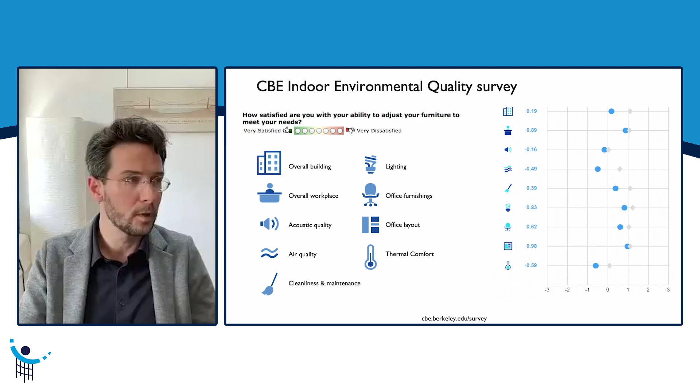And by looking at the data, we found that overall, roughly two-thirds of the occupants are satisfied with their space. Here the results are mainly about office environments, but we also have data for other types of environments, like for example schools or residential buildings.

And when we look at the things that are not going well, we notice that there is a high level of dissatisfaction with acoustics, in particular acoustical privacy - the ability of other people to hear what you are saying, or you being bothered by what other people are saying - and thermal environment.

If I go a little bit more in detail, in this slide you see the satisfaction level. These are data from roughly 900 buildings, almost 90,000 answers. This is by far the largest database available in the world about this topic. Usually the other databases have a subset of, let's say, 50, maybe up to 100 buildings. We collected this dataset over more than 20 years of research.

So we can see that overall, people are quite satisfied with the ability that they have to interact in the building. They are also quite satisfied with the amount of light. But even in this category, which has the highest rating, we still see only a satisfaction level of something around 70 to 80%. We are not able to achieve a higher level of satisfaction.

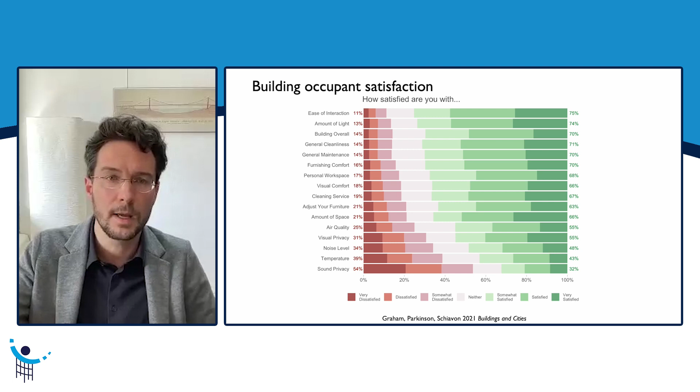Another way to look at this is through certification programs. Buildings can get certification for how sustainable they are or how much they promote well-being. One of these is the WELL certification in the United States, a performance-based system for measuring, certifying, and monitoring features of the building environment and how they impact health and well-being. They look at aspects like air quality, water, food, lighting, physical activity, thermal comfort, and mental health.

Here is an example of a sub-point related to the thermal environment. In this type of certification, the more points you get, the better. You get 2 points if at least 80% of people are satisfied, and 3 points if at least 90% are satisfied. Based on the data I showed earlier, we are very far from achieving this goal—typically only about 5% of buildings are able to achieve at least an 80% satisfaction rate.

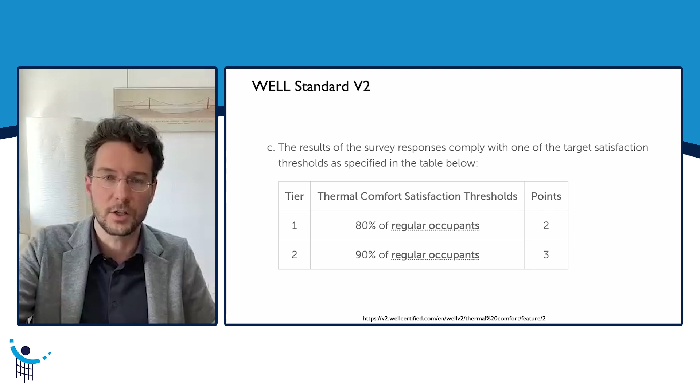When we look at why we're achieving such a low satisfaction rate, we notice an interesting trend. These results are for any type of building, but here I'm focusing only on temperature. The reason we see such a high level of dissatisfaction is that people do not have enough control over their environment.

Another interesting point is that people tend to be happier when they are close to a window, particularly if that window can be opened, giving them control. Moreover, they tend to be happier in a private office, probably because they can adapt their environment to their specific needs.

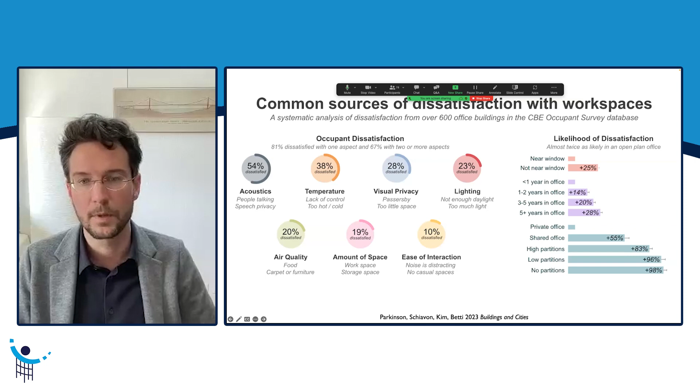Another interesting result is when we compare satisfaction levels for male versus female. We've done this analysis in two ways: one by looking at tweets people make related to their built environment, and the other from our own survey. What we notice is a higher level of dissatisfaction among females.

In a very bothering way, we found the problem is strongest in summer for people feeling too cold. In a building, we would like to see that if someone is uncomfortable in winter, it's because it's too cold, not too hot—because that means we are using energy cleverly and not wasting it to make people uncomfortable. Similarly, in summer, we would like people to feel too warm rather than too cold, but we found that 20% of occupants are unhappy in summer because it's too cold inside the office.

When we look at who is feeling too cold, 76% are female, meaning that at the same time we are wasting energy, we are making people uncomfortable, and that is disproportionately affecting women. I will not go into detail about why this is happening, but in case people have questions later, there are some ideas of why that could be.

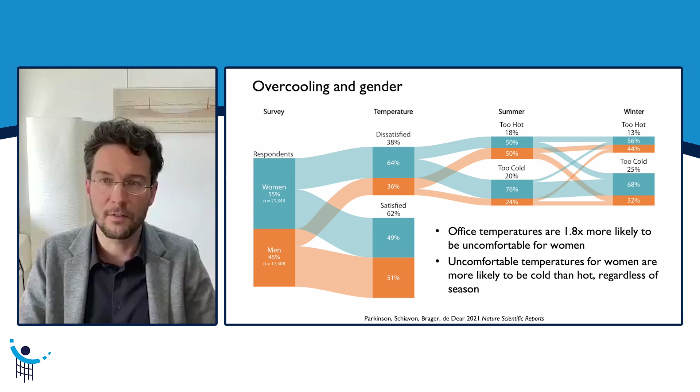So another potential solution is green certification, like the WELL or LEED certification that I mentioned before. But when we look at differences in satisfaction in LEED certified buildings versus non-LEED certified buildings—here we compare results from something around 10,000 people in one group and 10,000 people in the other group—overall we found little to no differences in satisfaction level.

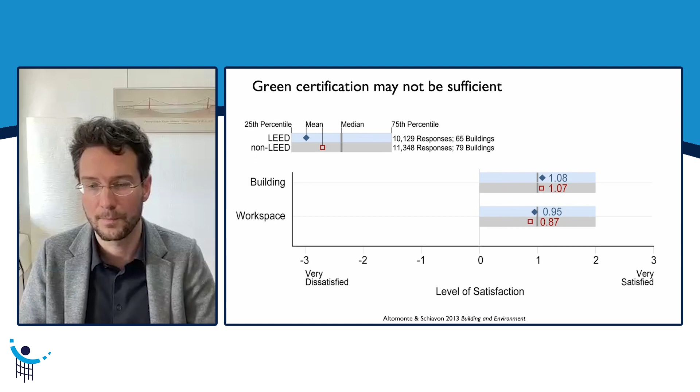So we have a problem here. We have a high level of dissatisfaction. Buildings use a lot of energy that has an economic impact for the owner, but also an environmental impact for the planet. And the typical tools that we are using, like building codes or certification programs, are not working too much. So what can we do?

Probably the most important step forward is to recognize that the existing paradigm used to create comfort in buildings is not working. Right now, we think that there is one temperature or a set of temperature and relative humidity that can satisfy everybody, and that's the way that we provide this service to people. We think that there is a specific temperature that can make everyone happy.

If we make a parallel to other fields, it would be like saying there is one chair size that can fit everybody, or that you may find a specific size of shirt or shoes that is okay for everybody, and the objective is to try to find the shoe size that satisfies the highest majority of people. That's how we now provide comfort in buildings—the same temperature for everybody.

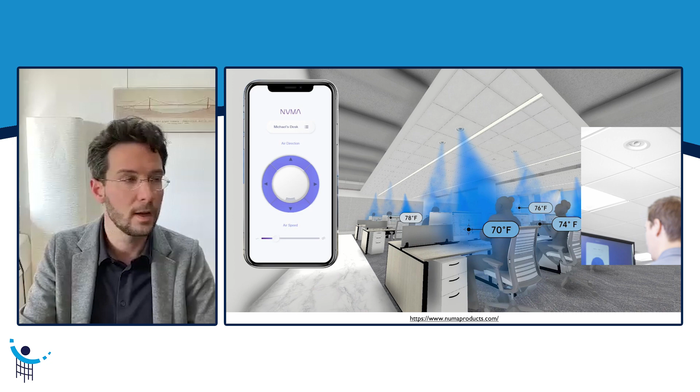We have other solutions where, for example, the HVAC system tries to provide something similar to what's happening in an airplane, a situation where people can control the temperature and the airspeed close to the area where they are. Or there are more affordable solutions, like the use of a fan to keep people cool in summer.

I will come back to this solution later on, because fans are a very effective way to provide comfort while also saving energy during the cooling season. One big advantage of fans is that they are more affordable for a larger part of the population compared to air conditioning.

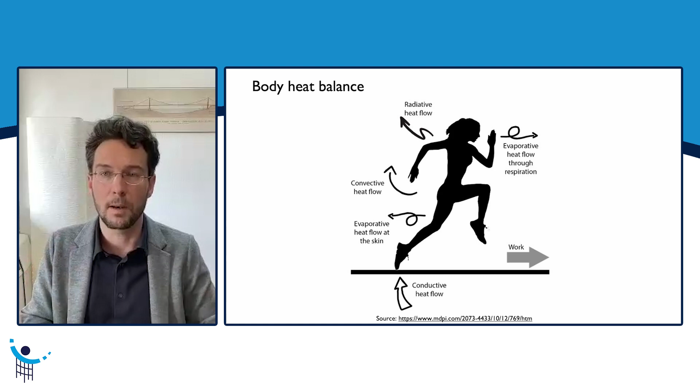Our body tends to be happy when the amount of heat generated inside it is more or less the same as the amount released. If you produce more heat than you release, for example during physical activity or in a very hot environment, your body will start to sweat, then vasodilate, trying to counteract that inability to release heat.

On the opposite, if you're in a situation where you release more heat than you produce, for example in a cold environment, then your body will move toward hypothermia. It will vasoconstrict, and therefore your hands and feet will get cold very quickly.

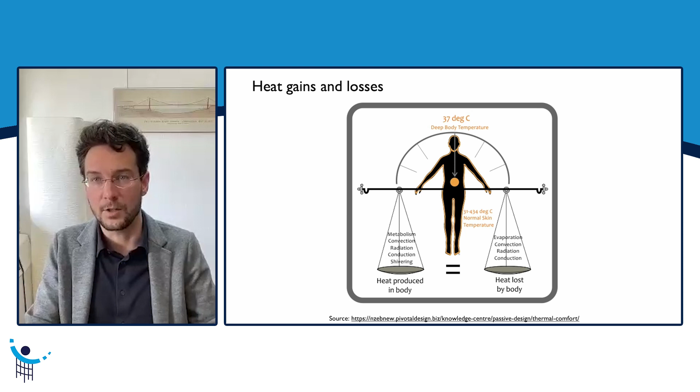So when we look at the thermal environment, we need to look at personal factors, like how much heat you are producing, named metabolic activity, and how much clothing you have, basically the level of insulation between yourself and the environment. Then we need to look at environmental parameters, things we can measure. Among them, the most measured one is air temperature, and sometimes air temperature along with relative humidity.

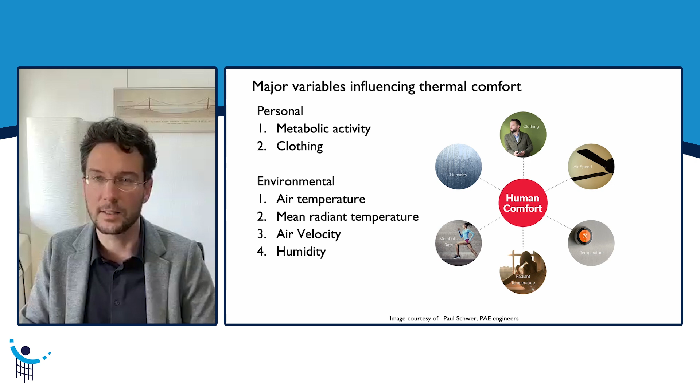Relative humidity is not very important in typical indoor conditions, but it becomes important when temperature is high and sweating and evaporation become the main mechanisms for releasing heat. The other two parameters that are rarely measured are mean radiant temperature, which is basically related to the average temperature of the surfaces around you, and air speed. I will spend the next couple of slides giving some examples of mean radiant temperature and why air velocity is important.

Something similar may happen if you're in front of a fireplace. Even if you're not exposed to the warm air generated by that fire, you still get some warming effect due to the radiation effect between the flame and the body.

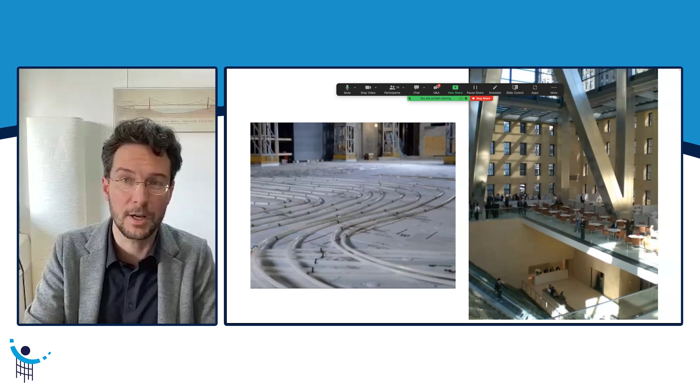The other dimension is airspeed, the use of air movement to provide cooling. We think at the Center for the Built Environment that air movement is an underappreciated technology, and we are pushing very hard to have a bigger presence in the built environment.

Why, for a couple of reasons. First, air conditioning a space is very expensive—the equipment is expensive to buy, and it's extremely expensive to operate. Moreover, the environmental impact of air conditioning is large, both through the energy used and because they use refrigerant that, when leaked to the environment, has a large impact on greenhouse gas emissions. On the opposite, fans are cheaper, and could become much cheaper in the future because fundamentally the technology is way simpler than an air conditioner.

An air conditioner needs a compressor, two heat exchangers or coils, a fan, and a connection between the inside and outside of the building. On the opposite, a fan is basically an electric motor with some plastic blades, and therefore fundamentally much cheaper. Moreover, a fan can operate with a small fraction of the energy used by an air conditioner.

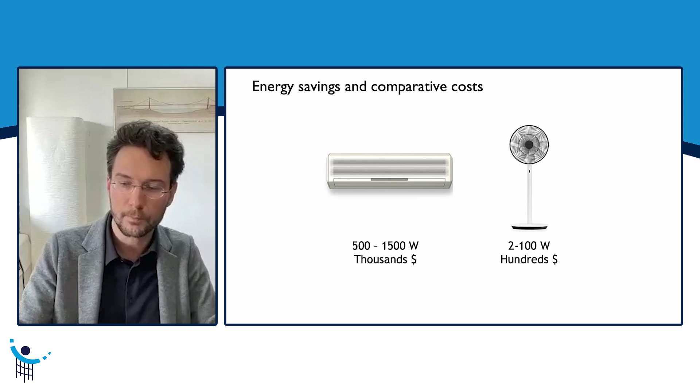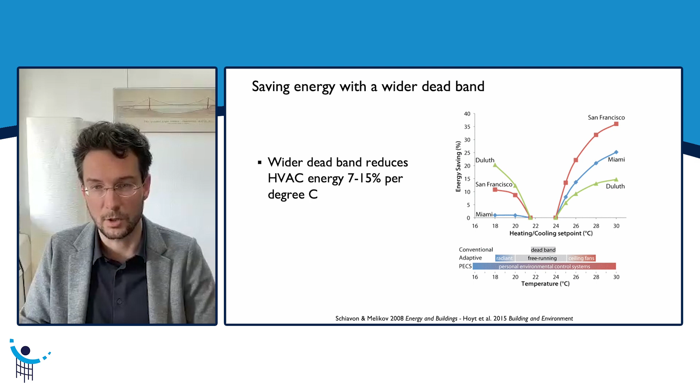We have done a lot of research to prove all of these points. For example, among the most cost-effective solutions to reduce energy consumption in buildings is to increase the temperature set point in summer and decrease it in winter, while providing personal comfort solutions to keep people equally comfortable. An example is a study we did in a high-end office environment in Singapore.

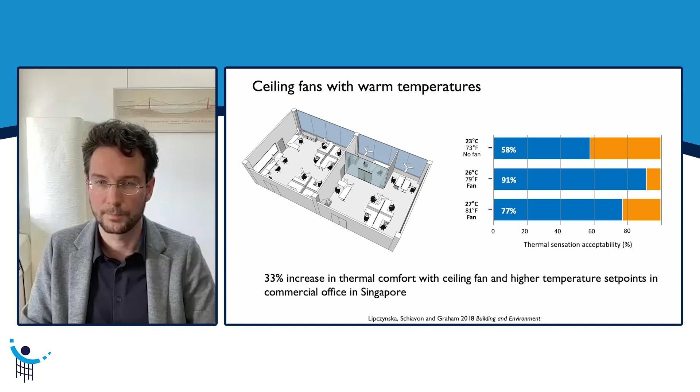We started with the typical condition of 23°C or 73°F without a fan, and measured that only 58% of people found the space acceptable from a thermal point of view. But when we increased the temperature set point to save energy and provided people with fans—in this case ceiling fans—we saw an increase in satisfaction up to 91%, along with a substantial reduction in energy consumption. We're starting to see fans become more common in buildings now.

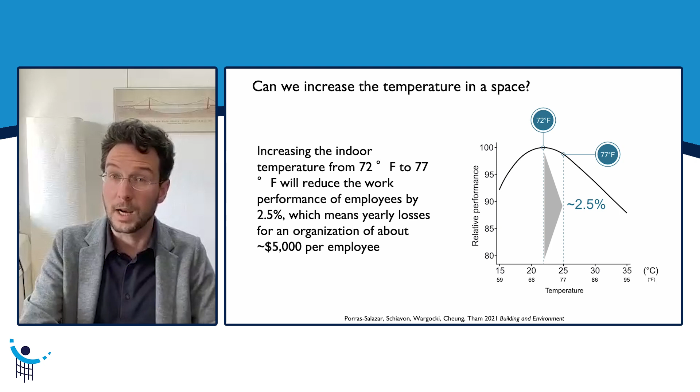We reanalyzed this equation, trying to recollect all the data used to develop it, and expanded the model by adding more recent studies. Both with the original data and the expanded data, we found that the equation is not reliable—we can basically fit any model with an equal level of performance using the existing data. Overall, we found there is no optimal temperature that increases performance.

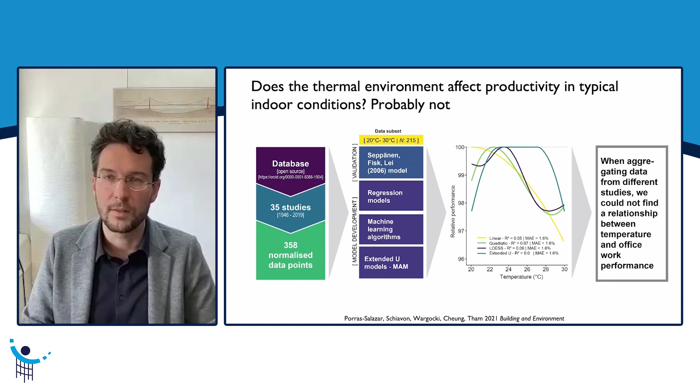Keep in mind, we're focusing on typical conditions found in buildings, not farm workers or outdoor construction workers. We're looking at temperatures ranging between 20 and 30 degrees Celsius. So overall, for typical building conditions, we didn't notice an effect of the thermal environment on performance. We think people can be comfortable at many temperatures—what's important is providing them with the ability to control their environment.

The main standard used to assess and design for thermal comfort is provided by the American Society of Heating, Refrigerating, and Air-Conditioning Engineers, and is named ASHRAE Standard 55. These standards take into account all the parameters I described before, like physical activity, clothing, temperature of surfaces, air velocity, and relative humidity.

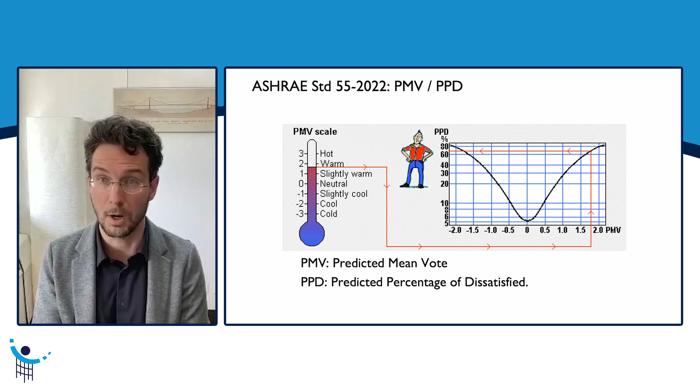It mainly uses a model called PMV, the Predicted Mean Vote, which tries to predict how many people will be dissatisfied in an environment. We assessed the performance of that model and found it's able to get the right answer only one time out of three. In case you want to see how this model works, we offer a tool for free.

It's available online at the link described over there, where you can input the different variables I mentioned earlier and see if a specific space complies or not with that standard. We also have other tools related to other thermal comfort standards or other types of heat stress conditions.

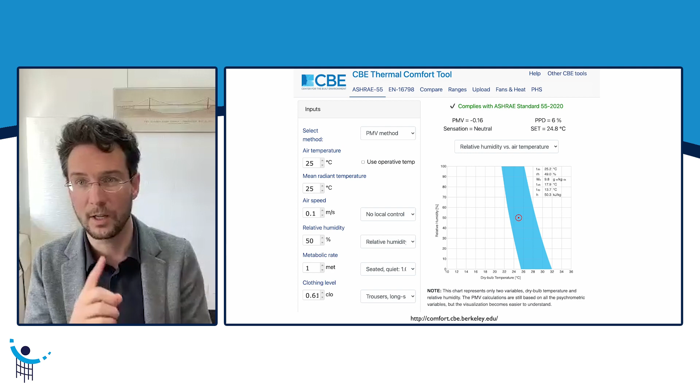In case you need to manage a lot of data points, not just a few, we also developed an open source Python library where you can input a continuous stream of data and calculate different types of thermal comfort indexes.

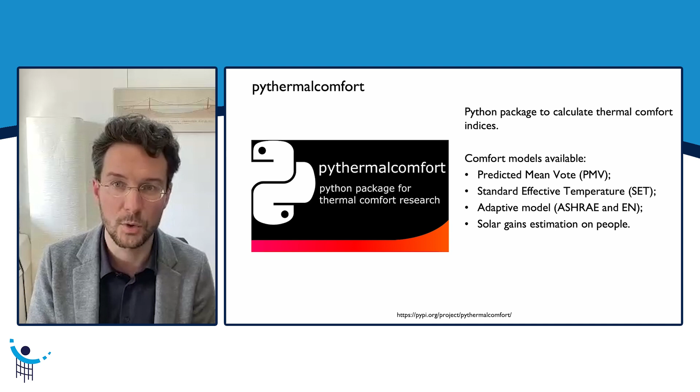But coming back to the accuracy of that model, I mentioned earlier that when we assessed it against more than 55,000 data points, we found that it gets the result correctly only one time out of three. So two-thirds of the time, the model is not able to predict what people will feel.

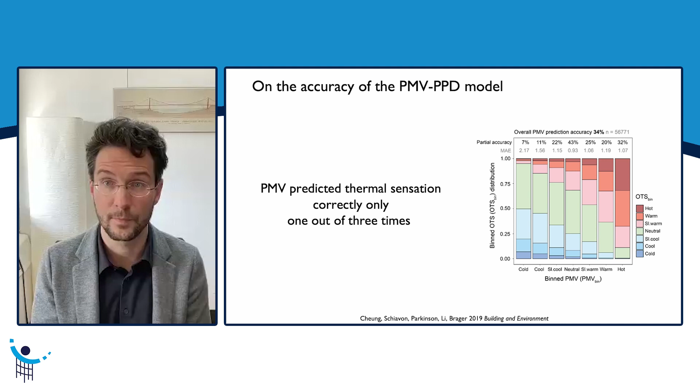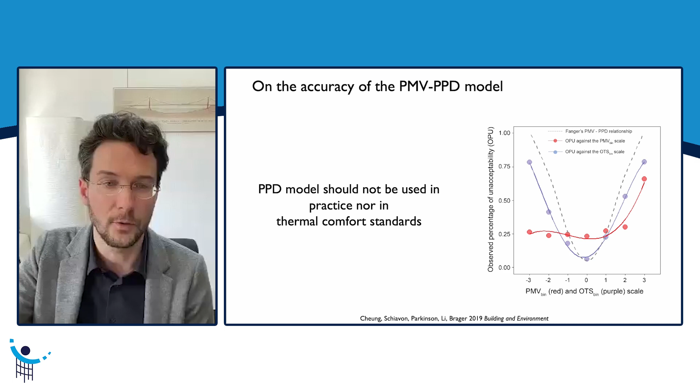If you look for solutions to create a comfortable environment, you will find several situations where people claim that a uniform environment is more comfortable. From a scientific point of view, we do not find this result. The problem is not that the environment needs to be uniform. The problem is that you need to tailor your space to the specific needs.

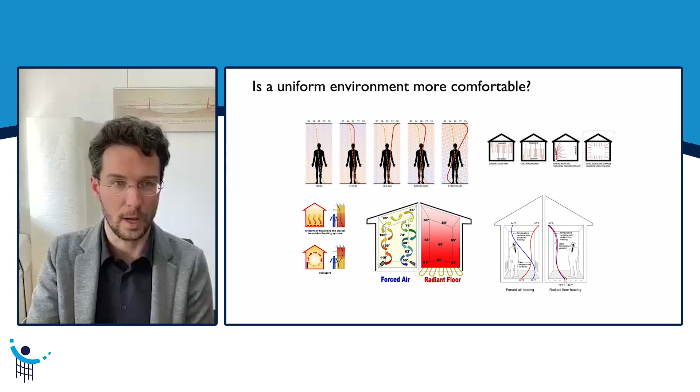So let me conclude with two takeaway messages. The first is that if you measure air temperature and relative humidity as the only way to assess the environment, you are missing other important variables. And I recognize that measuring those other variables is difficult, particularly in the case of air movement.

So ask people first, measure later.

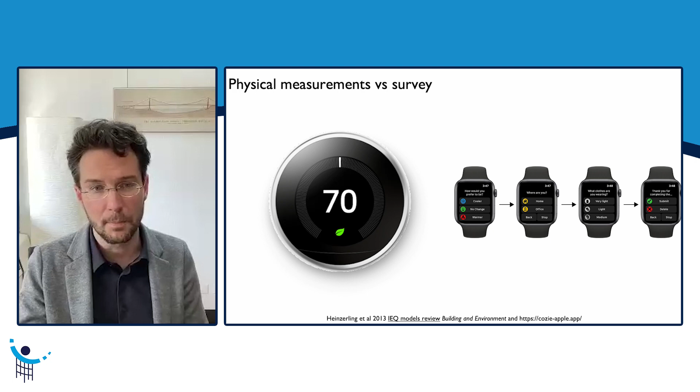Another important point is that not only what you monitor matters, but also the granularity of control you provide is important. If your system can only control air temperature and provide the same conditions for all your workers, then you do not have the ability to tailor to the specific needs of the people. People have different expectations, they have different physiology, and therefore you need to provide a personalized thermal environment.

Thank you very much.